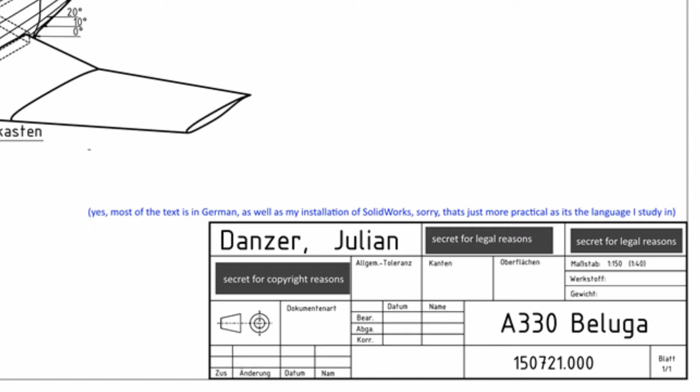Now this task was to introduce us to what we call Strak. Now I do learn in Germany, so most of the terms I know are German, and I'm not entirely sure about English translations, unfortunately, for all of them. So I'll just go with that.

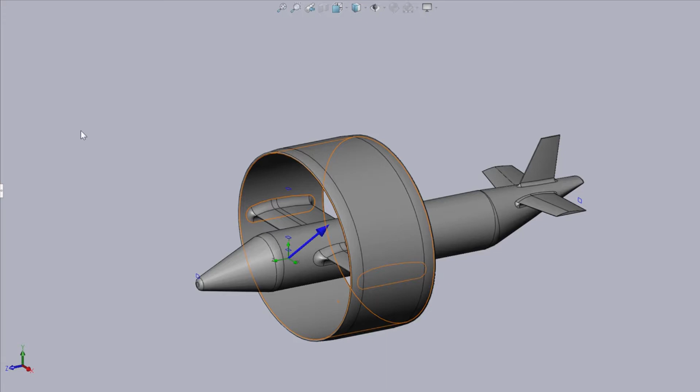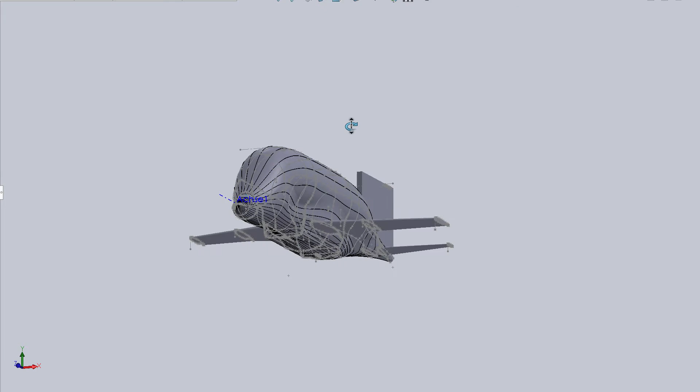But what that means is a very rough 3D model of the outer shape of any vehicle or machine where the outer shape matters, like an airplane, a space plane, a train, or anything that is aerodynamically shaped to some extent. These aren't really one-on-one accurate models, as they're usually solid or just a thin skin. There are no bolts, there are no individual parts. It's just the outer shape of the aircraft.

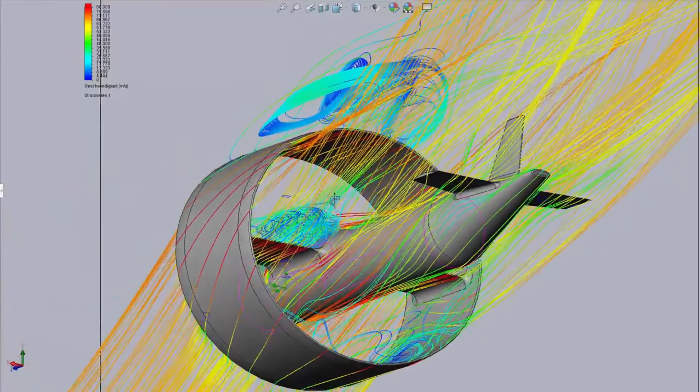It's usually done in early conceptualization. It is good enough to do first aerodynamic studies on, and also to some extent simplified structural studies, and to get a grasp of what the concept might look like and how things might fit into there. It's also what I did for fun for some other concepts, for example recreating the SpaceX ITS spacecraft to do aerodynamic studies on, which is what you see when I post aerodynamic studies.

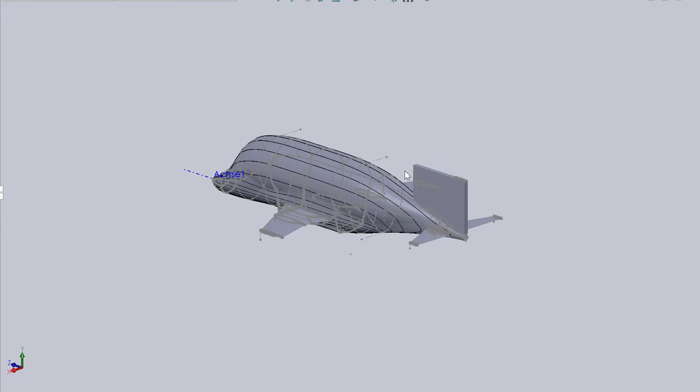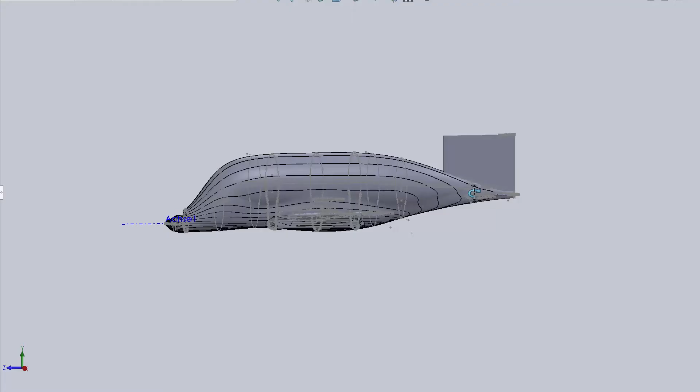But this one is an airplane, and it's a modified A330, and there were a few reasons why this one looks very weird. One of them being the very concept. This is supposed to be a successor to the Beluga plane, which is a modified A300 used by Airbus to carry airplane parts around. So it's designed to carry highly voluminous loads, so it has this huge bulge essentially on top of it, which is a cargo bay. So it's supposed to look a little bit weird, and to some degree it's just the limits of my skills at the time and the task that I was given. So it's not really a perfect design.

Also, this is a simplified schematic. It's lacking a lot of things. For once, the wingspan - the wings would be much longer, but for this schematic, essentially, we cut off the wings. So in this 3D model, the wingspan is 36 meters, but they're cut off at that length.

We were given wing profiles that had been previously designed as dots, basically a lot of dots with 2D coordinates, and you essentially connect the dots and get a wing profile. We should then use these several wing profiles and put them in different distances to design our wing. We also got several profiles for the fins and stabilizers, which are NACA, but in this simple schematic they don't really have control surfaces.

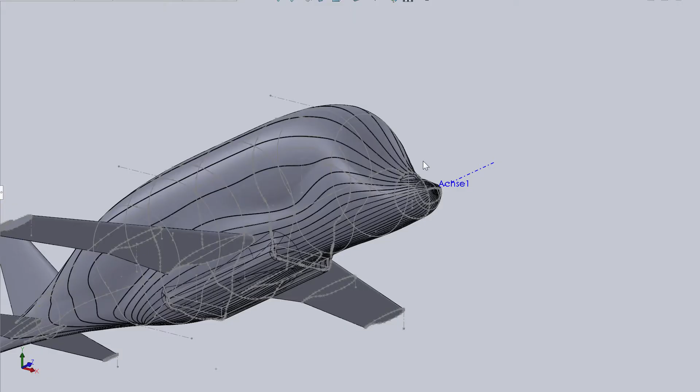The main focus was to design and visualize the main fuselage. Starting from the front, there's a simple nose shape and the cockpit windows, which in this case are just a cutout into this hollow shape, but the rough outline of the cockpit windows is visualized. You can see from the side or front that there's a piece cut out of the fuselage, and right behind the cockpit window is one cross section.

We were actually restricted in how we were allowed to design that cross section. In this case, just to teach us something, we were free in messing around with its dimensions and proportions to make the plane as aerodynamic and practical looking as we could, but the basic geometric way it was designed was previously given to us.

This is what is referred to as an egg curve. It's a little bit like an ellipse in a geometrical way, constructed similarly but also a little different. You essentially start with two circles which can have different centers. If they have the same center, it would actually be an ellipse, but if they don't have the same center, that's also okay, it's just not an ellipse then.

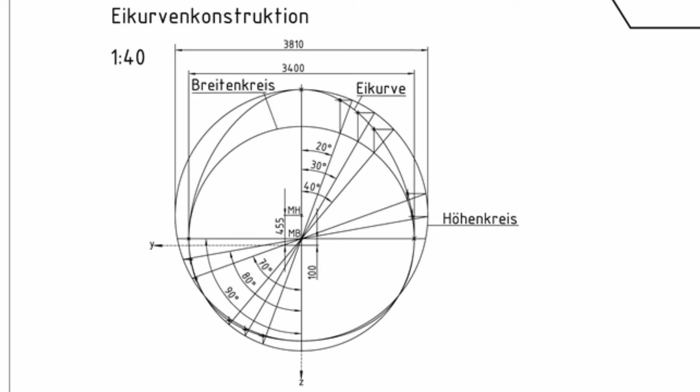They also have a slightly different diameter, and for each angle you take the x coordinate of one circle and the y coordinate of the other circle, then connect those dots. We were free to choose those circles, but we had to construct it in that way.

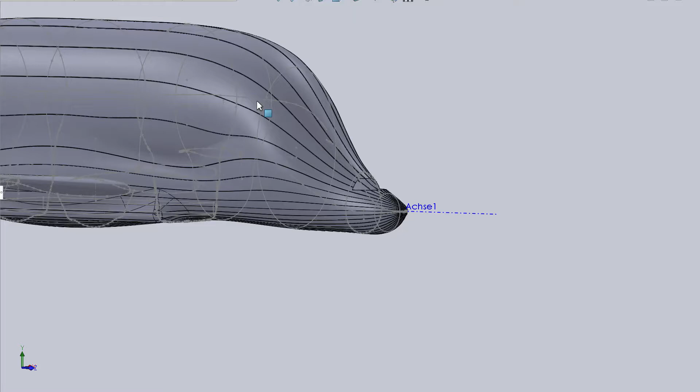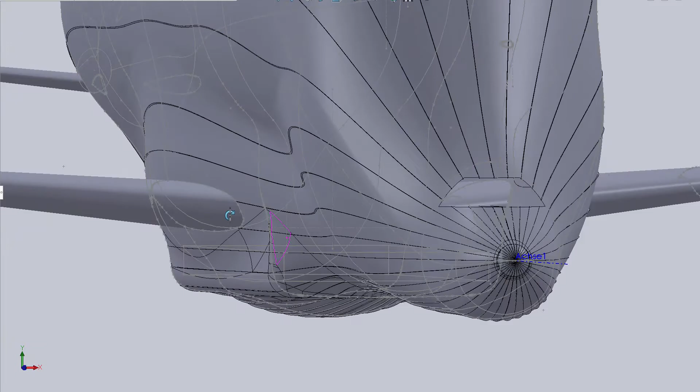Behind that is another cross-section we were free to design, and then there comes a slightly ugly part, due to the limitations of this not being an actual plane design but a homework designed to make us learn something. So the cross-section in front of the gearbox, the last cross-section where everything still looks somewhat okay, that was predefined — at least the lower part, the upper part we designed ourselves. But the lower part is identical to that of an actual A330, and its position and this cross section was clearly defined by the task we were given.

But then the slightly difficult part is that these homework tasks are individualized. To make it hard for us to copy from each other, the tasks get a number key. There are a few specifications to the task, a few parameters that can be changed as basic variables, basic numbers, and then a few number keys are randomly generated, so that although the general overall task is the same, each student's task is in detail a little bit different. These are randomly generated and not really checked over very carefully, and to some degree they are also made difficult so the airplane design might not end up being that great, but at least we learned something, because that's the main priority here.

So in this case, the gearbox of the plane — the mechanical box where the mechanisms for the landing gear and the landing gear itself are stored — has been shifted a little bit. It's not the one from the original A330, it's changed: it's a little bit bigger, and a little bit further ahead.

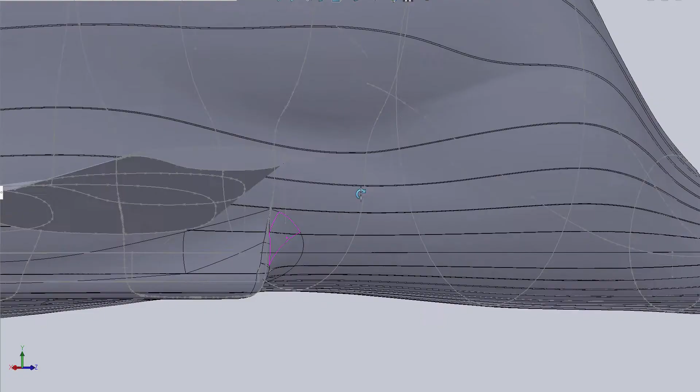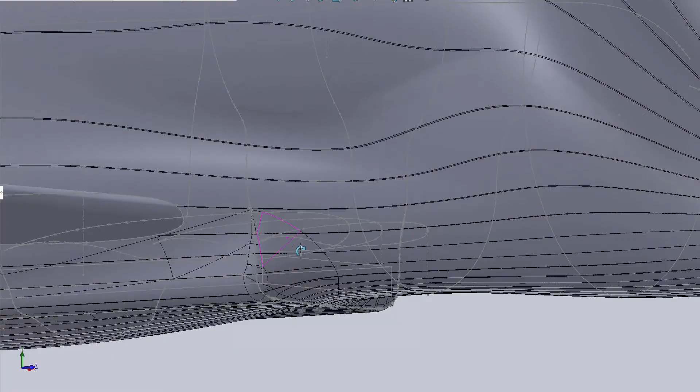So together with that predefined cross-section, that just gave this fast jolt of cross-section, because if I just continued that predefined cross-section further to the tail, the gearbox simply wouldn't have fit inside. So I had to vary that cross-section, and because the gearbox was very close to that cross-section, I had to vary it very suddenly, which never looks good and is never really aerodynamically great. But while I could probably do a little better nowadays, I did it as good as I could at that time, and that was pretty much the point, to see how good we could deal with that problem. As the grading showed, even back then I did well enough to be acceptable.

Slightly further back we start to see the wings, which were also somewhat predefined by parameters.

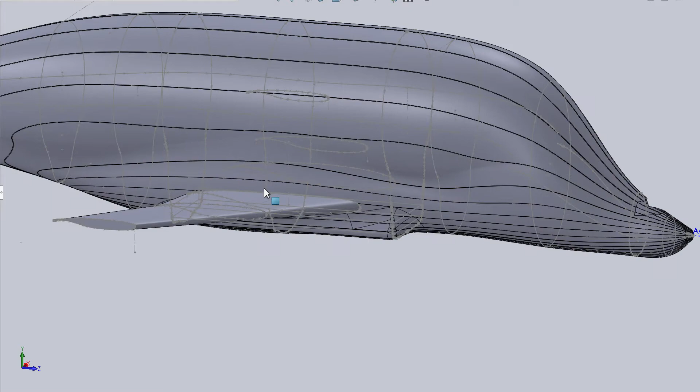We were given actual wing profiles in the form of several dots that we could connect, and we were given basic definitions of the wingspan of the airplane and how deep the wing should start based on the actual A330, but then we free-formed the wing out from there.

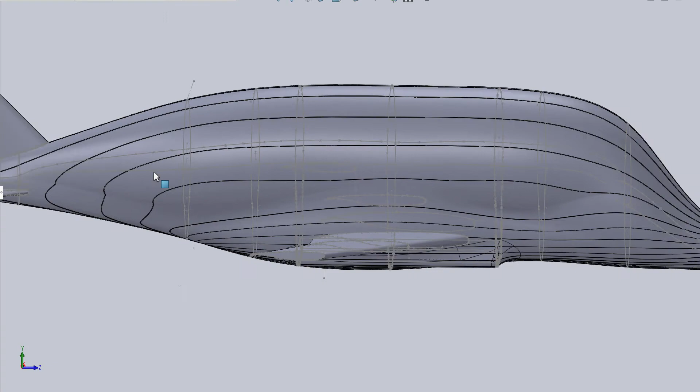There is also a marked line where the wing intersects with the fuselage, where it's basically connected. You could slightly round that, but we weren't supposed to. Yet it still gives you this nice auto-generated 3D curve hugging that wing profile.

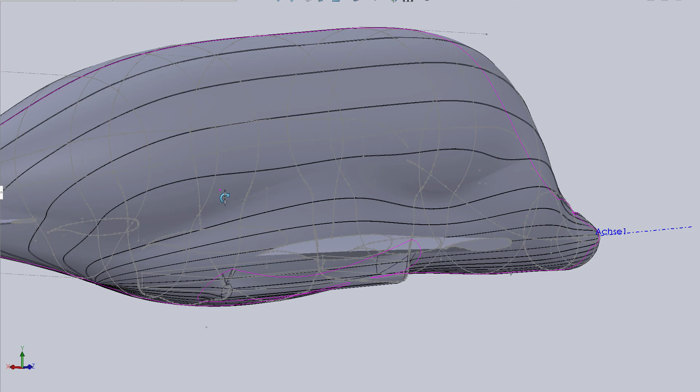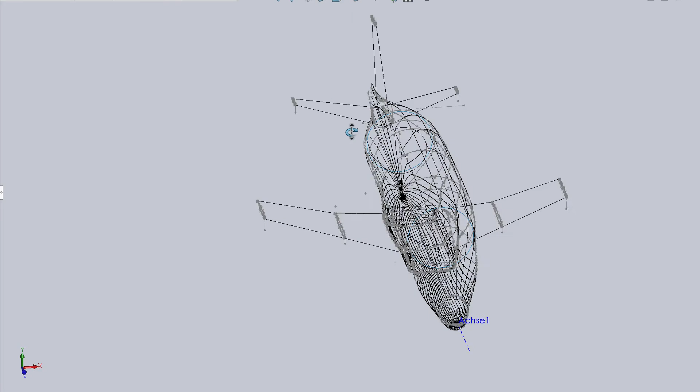The wing narrows into another profile and yet another, then it's cut off early at 36 meters of wingspan. The cross sections here are freely designed by us, though they do have to accommodate the gearbox as well as the payload cargo bay, and they were rated by how aerodynamic and how practical they would be.

At the tailwards end of the gearbox you can see a slightly nicer transition, because here we didn't have such close predefined cross sections, so it was a lot easier to make a somewhat aerodynamic slope from the gearbox into the rest of the fuselage.

Then we were approaching the tail. Here the upper halves of the cross sections were previously given, and we had to freely design the lower halves. Then we'd get to the tail, where we have the stabilizer and rudder, based on the profiles used by the actual 330, narrowing down to a slightly different profile at the tip.

The tail is also slightly cut off at the end. This was also part of the task — the tail should be cut off and end in this exact ellipse, making the overall schematic 85.8 meters long and giving it a wingspan of 36 meters, although the wings are cut off.

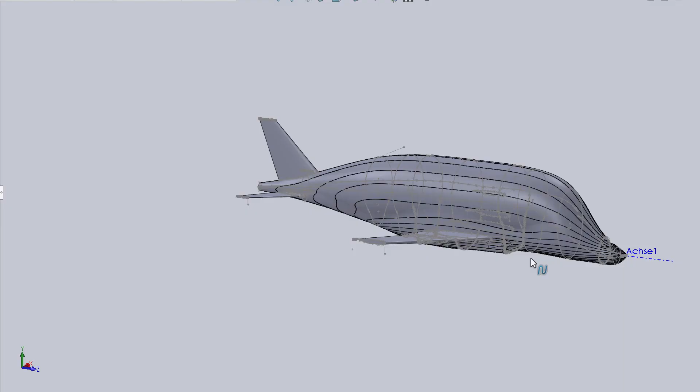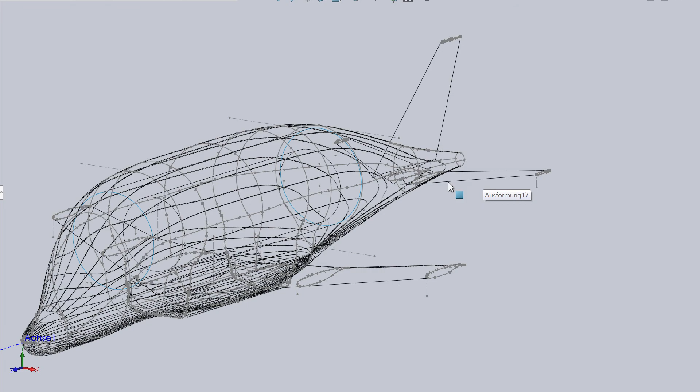The lines you see within the model are partially indicators for where the insides we had to accommodate lay, so the gearbox and the payload bay. Then there are the cross sections we designed, as well as the profiles for the wings and stabilizers, the lines where the wings and stabilizers meet the fuselage, and lengthwise cross-sections taken through planes on the lengthwise axis but rotated around different degrees.

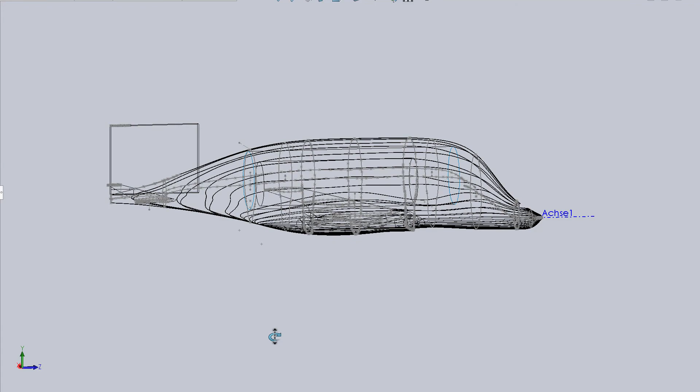These do look slightly weird here. They usually look a lot nicer for normal airplanes, but since this is a somewhat weird looking airplane, they end up looking a bit strange, curving back and forth at some points, because the fuselage is actually indented at a few points.

Around the gearbox there are a few places where these lines get so close to each other that it actually caused a little trouble, because we had to print this out as a kind of blueprint — not actually blue, but a plotted big sketch — and the lines had to be of a predefined thickness, which means if the lines get too close, they just merge into one black surface, and we aren't allowed to change the thickness of the lines.

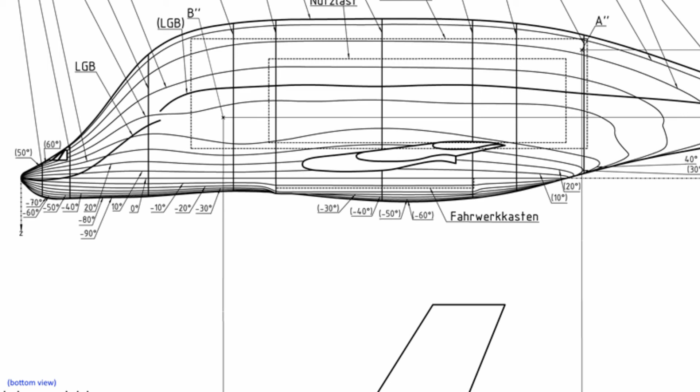You could try to change the design so the lines wouldn't get that close, or just live with the fact that you had one black surface instead of separate lines on your design. Either way it wasn't really pretty, but it was acceptable because there wasn't really any way to avoid it.

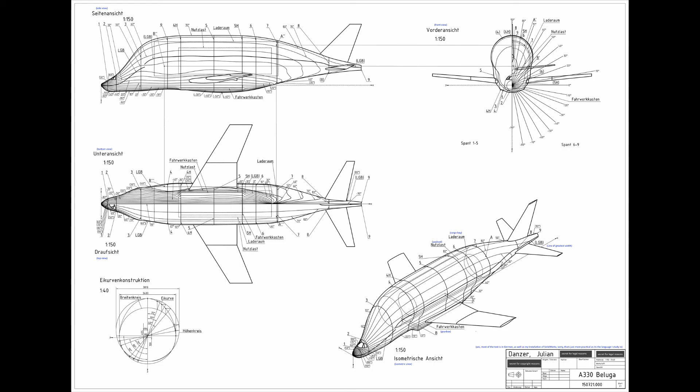In an actual airplane design project, you would most likely just make a little window in your sketch and zoom into that particular area. But here we weren't allowed that, so we had to go with black areas where these lines merged because they were too close. Apart from the little gearbox dent at the front end of the gearbox, I'm generally rather happy with the aerodynamic design of this thing.